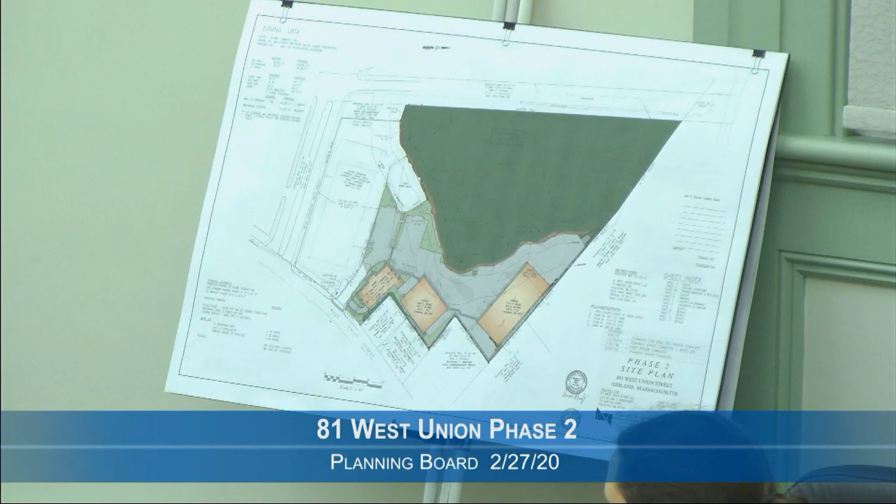I'll focus on the design site changes first. The two easy ones we talked about: we made basically the spaces here and here 18 feet. That's your typical standard, and I've got copies if you want them from Framingham, Natick, and Holliston, 18 feet. We've kept the 24 feet of backup. By doing the 18-foot-deep spaces here, we were able to create a walkway through that.

That design change, as well as taking the loading area out of here as we talked about last time, were shown on the plan submitted to the design review group. From the viewpoint of the 18 feet parking spaces, I think they were in full agreement with that. They liked the concept of this landscape. The other thing we did, as you can see in the plan, was create crosswalks all the way through the site in a 5-foot concrete strip in front of the buildings as the crosswalk. They were supportive of all those pedestrian improvements. So those were the two big changes that we made.

At the design review committee meeting, there was discussion from the viewpoint of the residential units that are there.

And trying to create a little bit of separation from the commercial space with that. The original plan had a different configuration of the parking spaces out here. We gave you the full footprints of the buildings, and we revised some of the layout of those spaces to match more exactly with the garage doors and entry to those facilities.

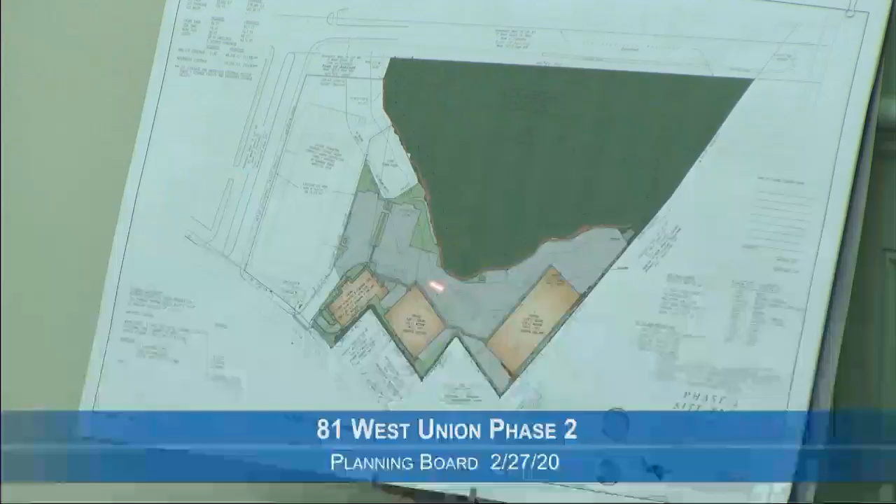There was discussion at the design review board about having removable planters that we could put in there, and we don't show them on this plan, but we have no issues with that.

So we've addressed, from our point of view, the comments your peer consultant had, which was the conflict of having a loading area here. Again, we took that out. We have a loading area here and a loading area over there.

The parking spaces we show back up out of here have the full 24 feet of backup before they would come in contact, should a truck be there. So we meet all the backup standards and everything else. So from the viewpoint of site comments from your peer consultant, I think we've addressed his issues.

I think that's generally it in the nature of the site changes. From the viewpoint of the changes of the building design and everything else, I'll talk about them briefly, but I think we showed the board the plans for building one.

The rooftop element came as a result of comments from the design review group two meetings ago. They also had comments from the viewpoint of arching this in comparison to that, and comments about the style of the separation of the window panes. We've addressed that — they wanted more vertical than horizontal.

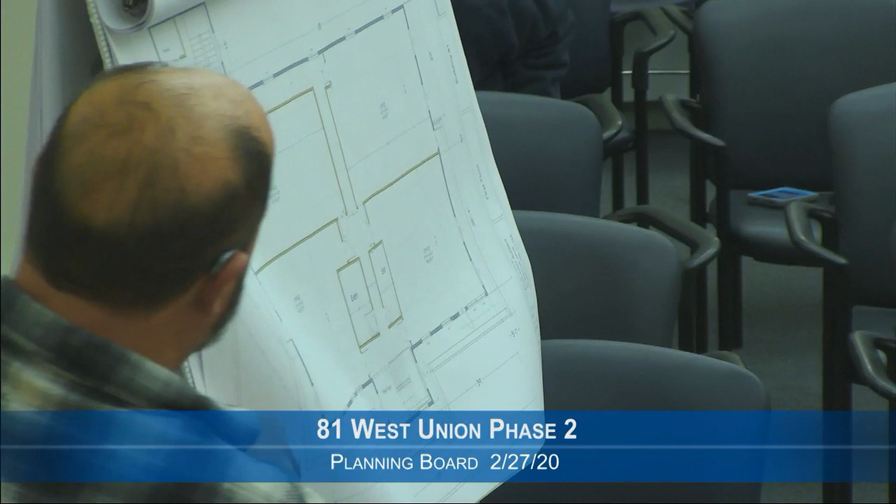First floor plans: two means of egress from each unit, leading to two exits out of the building. Some of the units actually have a door that leads right from that unit to the outside — well, actually, each unit does. When we wrapped a porch around, that gave us an exit here, or an entrance. So everyone has an exit right outside.

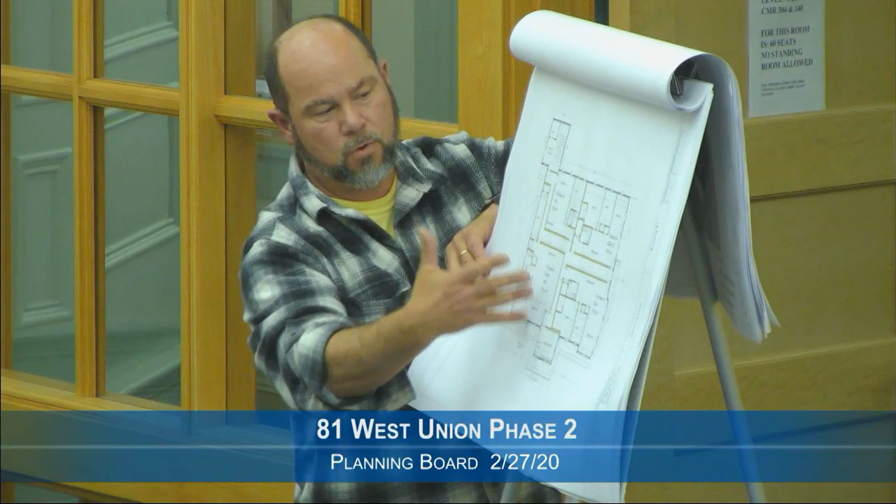On the second floor, you have 4 units. The reason why windows are where they are — you can see that we tried to get the sleeping rooms needed to have an emergency window. This shows that you have 3 two-bedrooms and 1 studio, just because of where it is. In the hallways, every apartment has 2 doors that lead to a hallway with 2 exits down and out of the building. The 3rd floor is a mirror image of the 2nd floor.

So from the viewpoint of the design review comments, we've addressed all the alignment issues. We're in agreement with the fencing element matching the trim color within the building, as was one of their suggestions. We don't have any problem with that. On the signs and the lighting, we're in agreement with that as well.

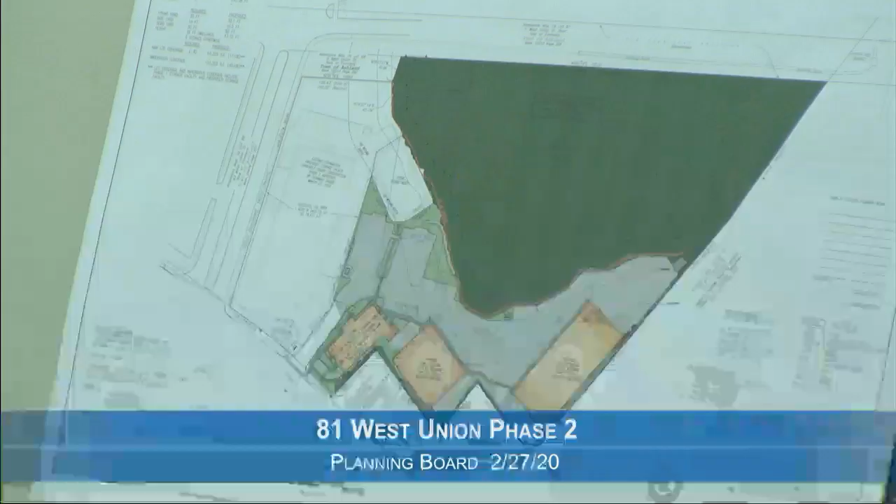So the only thing, I guess to some extent, we have non-agreement with from the viewpoint of the design board group is the access into the basement. This plan does reflect a series of shrubs on both sides of the drive to screen that. It's tough to see, but you can see the little circles on both sides from the sidewalk to the building. It was certainly agreeable to do that. As we've talked about before, that is space for the tenants within the building. There's a great supply of residential apartments, as you know, in Ashland and other towns, and having the ability to have storage space and access to storage space for those tenants, we think would be a good amenity to help us make sure we rent those units.

So we've properly screened that driveway access. Why doesn't access at the other elevator side of the building provide that? There's a common hallway, right, not any type of vehicular access if people are trying to unload or load anything into their storage areas, or to service the mechanicals that are going to be in the basement as well. And if people are going to bring stuff in, like the elevators at the other far corner there, right? I would concur with the design review - I understand you're going to screen it, but that would be a nice patch of grass instead of a driveway.

So, I mean, the basement is for tenant storage, we're not talking commercial. Nope, it was dry goods when it was all more commercial. And I think your consultant commented on that - there's no per se design standard from the viewpoint of slopes, but given the limited use of the thing, he didn't see any particular issues with it.

So I think that's it in the nature of building 1. As to building 2, going through their residential comments, again one of the things they talked about was creating more of a residential feel there. I think we did it in the nature of the architecture - same comments go through from the viewpoint of alignment, particularly of these sets of windows here, which we've done, and shifted those a little bit.

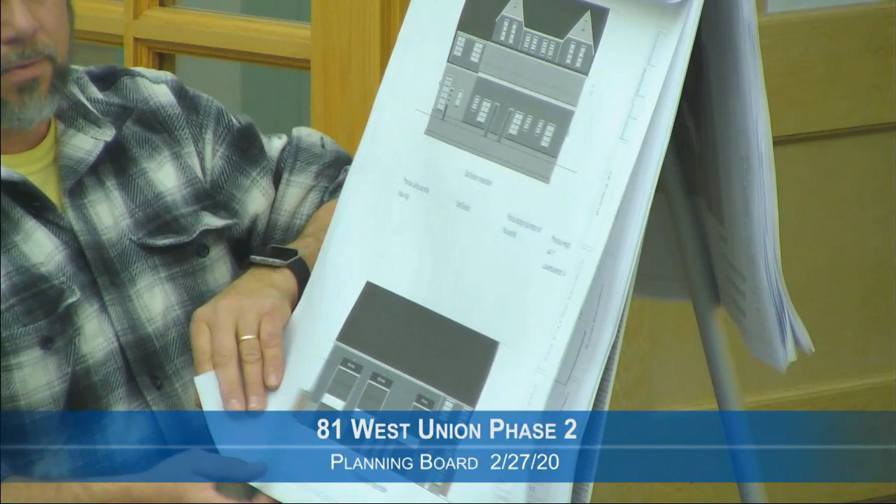And then back to the alignment - these corner windows, originally I had them more into the corners, but to align the dormer windows with these windows, I moved them in, and that seemed to help the appearance and balance out this wall a little bit better as well. And the other thing was I reconfigured the kitchen because there was concern about this one window not aligning, so I swapped the sink and dishwasher so that this window now aligns with theirs, creating some type of symmetry.

And this is the commercial side of the building facing off into the woods. The printing is showing shadows, but you can see that it has a totally different feel and appearance on this side of the building than it does on the other, which we had.

And there's actually going to be green space here for the tenants, and we added green space as you come along to the fence. So those people will actually have a little bit of yard.

That's looking back from the other way. This building is considerably lower than the original building. As I drove by West Union coming here tonight, I noticed Mr. Ferris's house - everybody kept talking about the heights of the building, but that's a tall 2-story home, not a little bitty Cape Cod house. So I think the heights are being somehow misrepresented. This building is longer than his house, but it's not considerably higher, if it is at all, in height to his house.

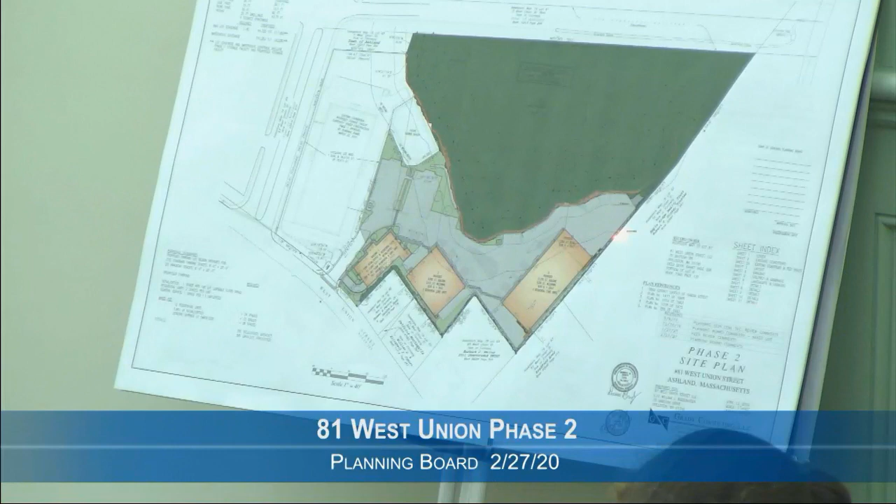So on building 3, we had a number of discussions with the design group from the viewpoint of access to the residentials - discussions in the nature of the stairway which leads on the left-hand side, basically straight out from that building, and trying to talk about a switchback, which we're not capable of doing because of the garage door entry at that location.

And we talked about handicapped accessibility in one of the units, and what you've got on the floor plans. You want to go to the floor plan? This door leads to an elevator or a lift - there's a room for that residential unit. So that's all interior.

We'll talk about this staircase. So there's a lift in here to provide access to the residential unit on the second floor. And it's in compliance with the ADA access board - I downloaded all of the information from there to make sure we met all the requirements.

As we have referenced to the board, anticipating all the mechanicals and everything in the roof structure, design review was right in the sense that our roof depictions don't identify those vents, but we'd have to install vents for the roof things, which if you want us to show those on a plan, we can. They're going to be whatever code requires - like plumbing vents, or mechanical vents, you know, the little pipes, or whether we're doing louvers. We haven't gotten to that level because they haven't sized necessarily any of the equipment yet.

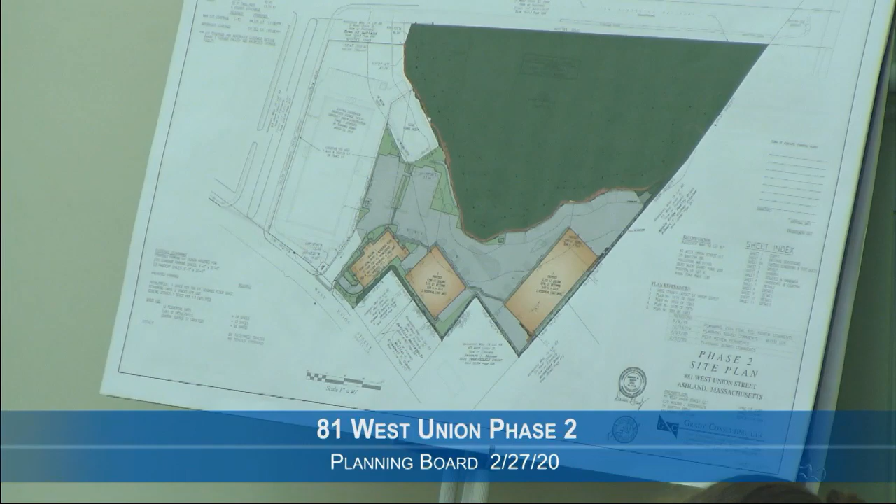So I think that's where we are in the nature of changes that we have made or were requested to make, and certainly we'll answer any questions you have.

Just one quick question on building one - if we look at the rendering, you can see a few places where the windows on the third floor are different from the windows on the second floor. I think those are cases where there's stairways and such, as opposed to the apartments. You can see right in the front where there's two windows instead of four windows. I think because this is 3D, you're not looking at it in perfect scale. No, but you can see the third floor clearly has different windows on that little bump out, which on the plans, when you look at it, you see there's a stairway there.

All the windows are the same - well, I'm not saying the window style is different, I'm just saying the third floor windows aren't quite the same position as the second floor windows. You can see there's two pairs of windows, and then one pair that does not match that. I'm not complaining about it, but when you look at the floor layout for the third floor, it looks the same as the second floor and doesn't match the rendering. Oh, this is not on the floor - this is in this.

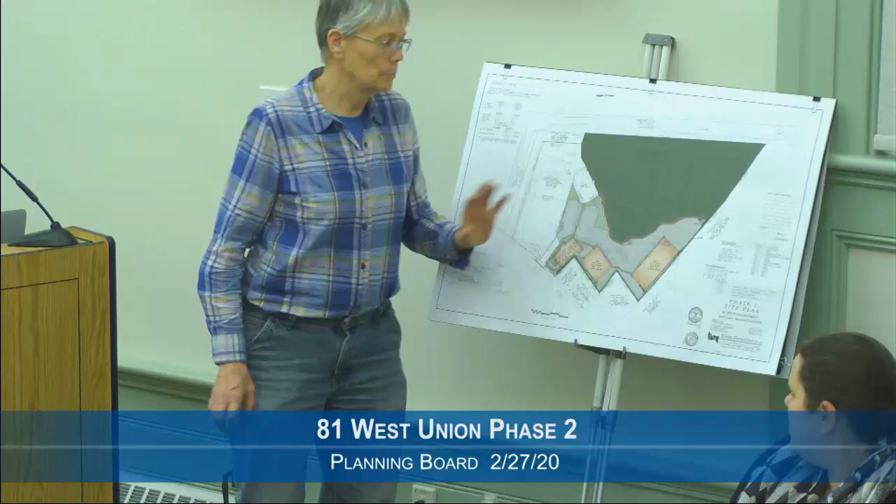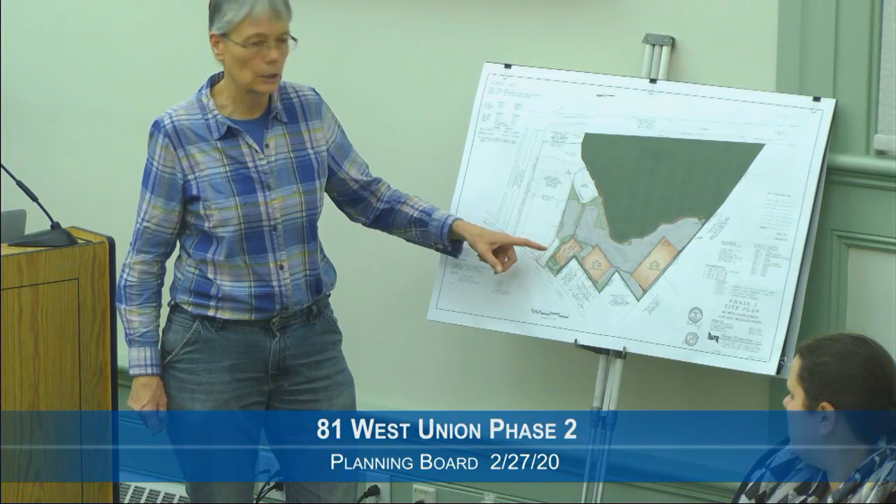And the other thing, which I think they've done, but we were really, I think we were all sort of surprised by the covenant thing. This building, they've spent a lot of time working on and making it look really good for residential. We like what they've done.

When we start putting residential in these buildings, they're like in an ocean of blacktop. So you've got people trying to live in a building like this, there's no place to put the grill outside or do any of that other stuff. It's just sort of really odd. I'll leave it at that. I think that's what we all thought.

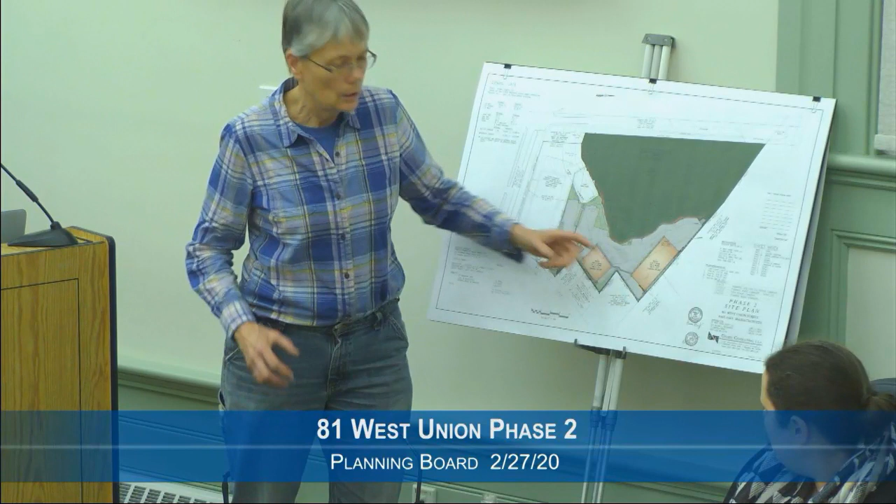So they agreed to put some planters in, and add some barrier lattice, if you will, or some kind of screening between where the commercial, park and garage openings are and the residential areas are, just to say you can't park a big truck in front of somebody's kitchen window. So, that's pretty much where we're at.

This we're most concerned about because of where it is on the street and what you're going to see. It's the thing you see the most. Everything else seems to be pretty well screened and it's dropped down in elevation.

Joe brought up the issue of why is it there versus something else - that's almost verbatim what one of the other guys said. So that's a site plan issue that was brought up, and it's like, nope, we're not changing it. With the issue of that back stair being this bridge thing out, it's been brought up again and again. This isn't just a general comment that Joe keeps saying - why do we have this egress, the stair in the back - and the answer is no, we can't change it because it goes in front of a garage door. Well, figure out a way to change it.

The issue we have the most of is getting in and getting out. You're going to drive down here - then how are you turning around? Are you going into the building to turn around? Or are you backing out?

Kathy, I agree, I struggle with the driveway. I understand they didn't want to change it based on design review, but that was our big comment - that you wanted it changed. Yeah, that was part of our discussion, because we just can't figure out what's going to happen here.

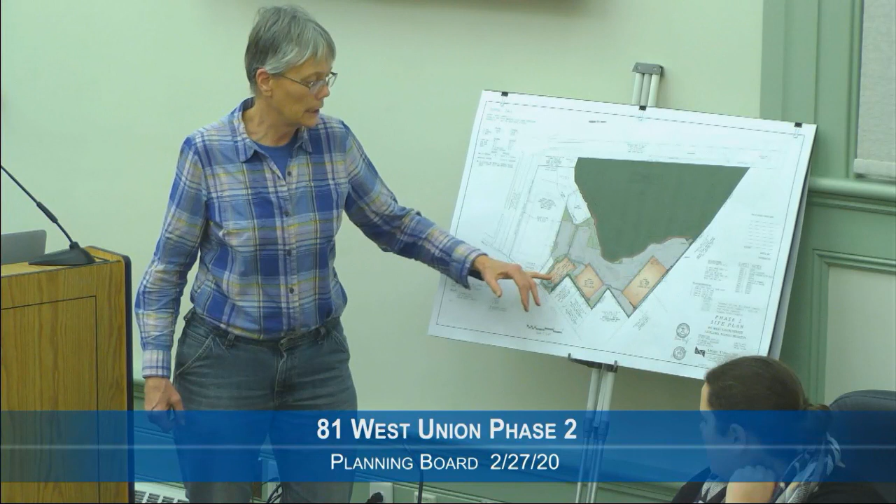And you already have an elevator and you already have stairs, and theoretically you have a way for people to get stuff in and out of the building. And you do that if you're a contractor - well, I'm a contractor, my husband's a contractor, that's what you do. You might not like it, but you don't necessarily have the ability to get into a building this way, because you just don't. So that was our concern.

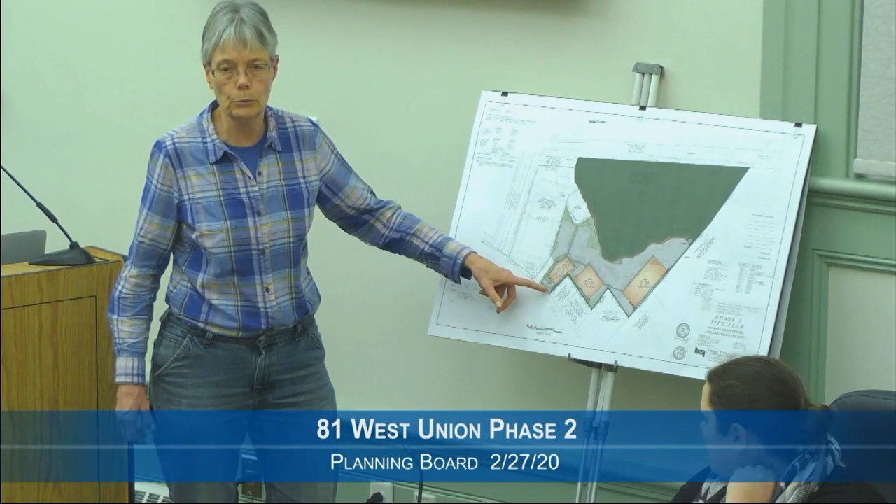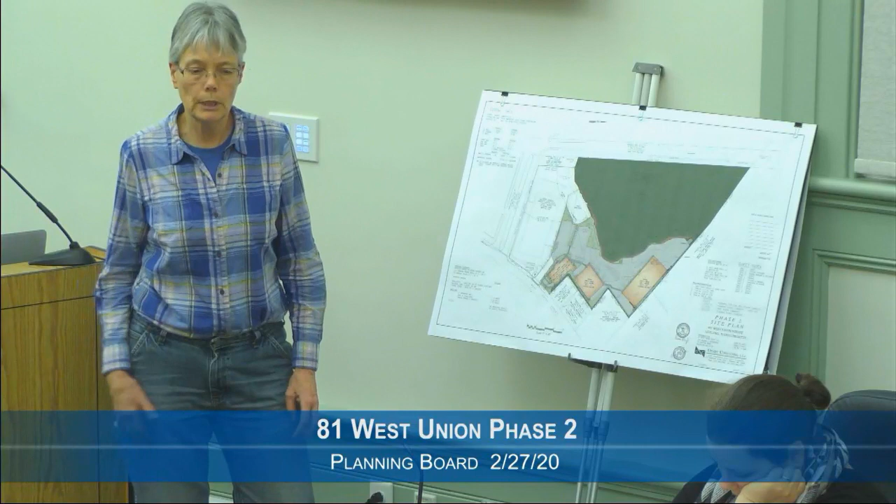But if this is going to stay, we really wanted this a lot more screened than just a row or two rows - we want it to be more dense. I offered to help Mr. Rodenheiser, because he did some really nice stuff for us at the town forest, and I said I can give them some advice and show them what to do and give them some plant advice. That's my piece on this, but I do have some comments about another project.

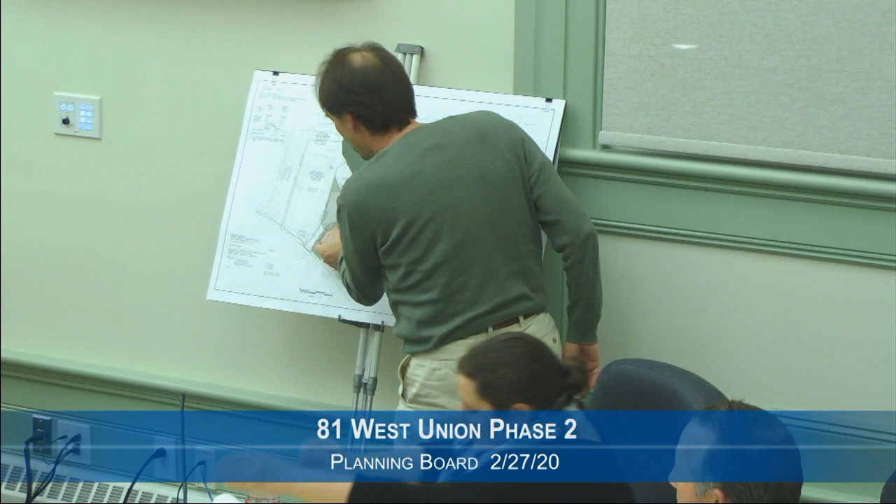All right, so let's look at that little driveway thing there. Can you explain again exactly what - because I look at the rendering for this side of the building, and I don't see anything that shows why there's this driveway here.

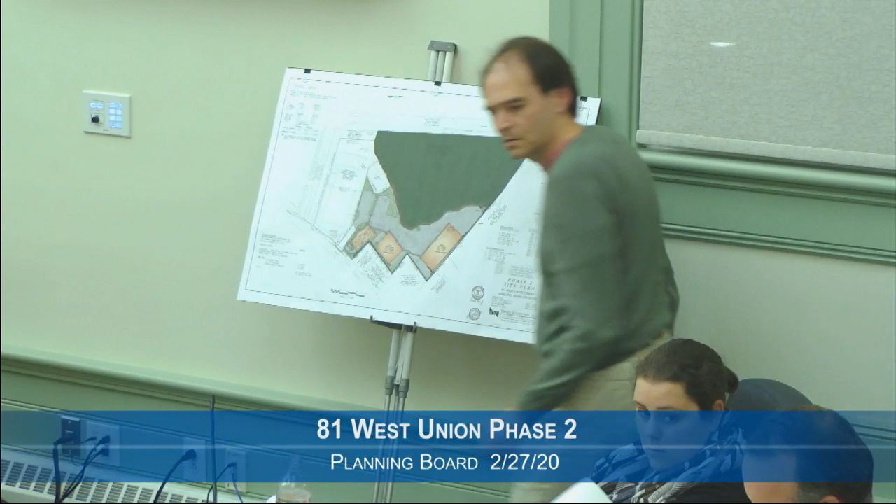Well, you wouldn't, because the rendering takes you from the base of the building up. That is a sunken area, and the roadway is down at about 246, and that is up to 248, so it's all looking across and down. You wouldn't depict that on a rendering because it's a hole - there's not anything sticking up to block the building.

There was an ask for some perspective drawings at the last meeting, I think. Have I missed them in this package? Yeah, we submitted some perspective drawings. Well, it was supposed to show relative to the existing buildings, but I don't see it.

I don't see anything that shows any of the landscaping with the building, and I don't see anything that shows any of the neighboring buildings. If you had shown a rendering that showed that little driveway in there, it would be very clear what we're getting. Right now, the only picture we have that shows that driveway is the top-down site plan. I don't know what we would show you - if you put a cross-section, all you're gonna show is you drop down, go over, come back up. No, I'm saying, you should be able to.

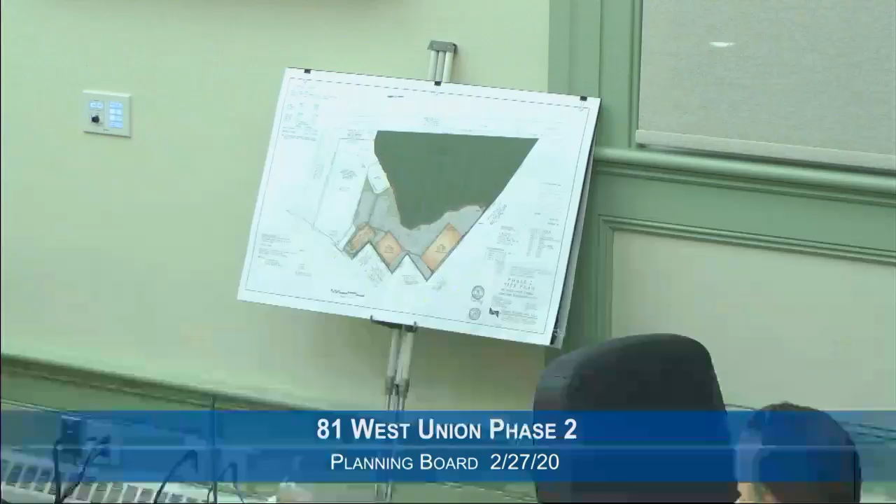You're telling us we're not getting the driveway? If I were standing right here, what would I see? It would show a driveway going down to the basement, right? I can see something that shows the driveway goes down to the building, shows basement floor, and the landscaping you're putting in.

So this is literally like if you're standing at the bottom of that driveway, there's 6 feet of wall next to you to grade. At this point it's basically at grade, and as you go down it goes to 4.5 or 5.

With all due respect, if that's for tenant basement storage, we're gonna have a sunken driveway right in front of the building. That doesn't seem consistent when there's an elevator and a stair on the other end. It's horrible, right in front on the street.

This is not by right. I mean, there may be nothing in your zoning bylaw that says you can't do it, but it's a special permit.

One of the depictions we gave you, and again it's tough to see, but there it is, right there, it's the whole thing going down. I haven't seen that. Neither have I. Emma's going to print them out.

So they didn't get the drawings we sent them? Not these, not that set. The office did receive them, but I have not looked at them yet, I have not had time.